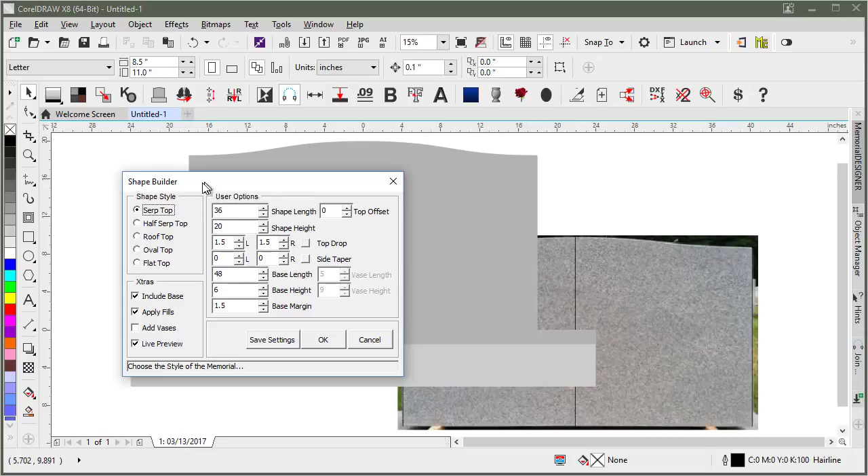So then what I would do is simply run Shape Builder here. I'll move this over to the side so we can see. With Shape Builder, I can say 36.25, because that's how big that was.

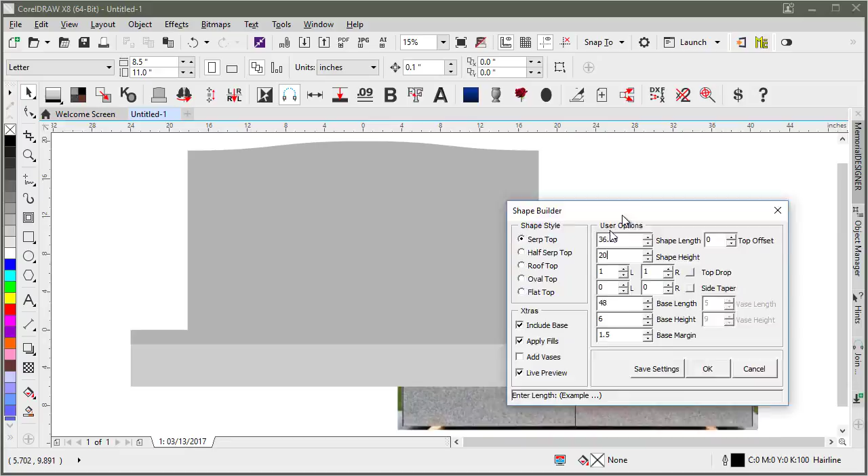The overall height was 20, and then the drop was 1 inch on either side, so I'd just do 1 inch. If it was a different size, I could adjust this either by 1/8 inch increments, or I could just type in whatever those happen to be.

And they could be different on either side. Usually you'd want them to be the same, but let's just say we kept them at 1 inch.

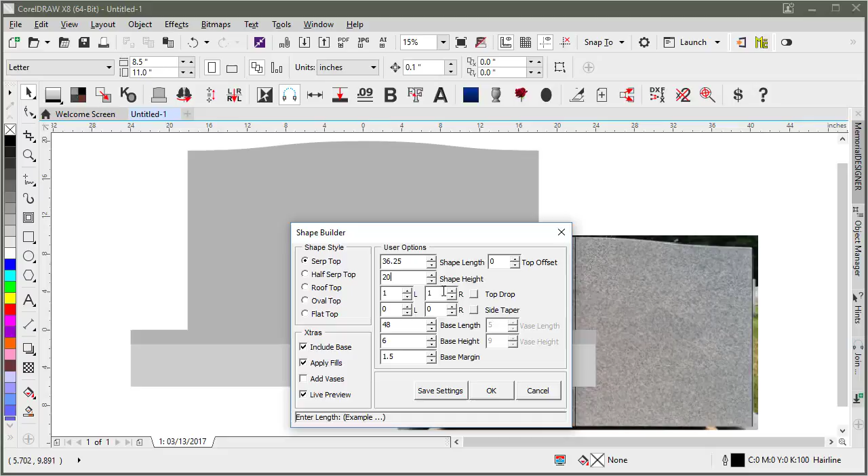So this stone should be a pretty good match for that. I'll take out the color, just give it a black outline. Maybe I'll give it a little different color outline, so I'll give it a yellow outline here, and I'll just throw it over the top of my piece here.

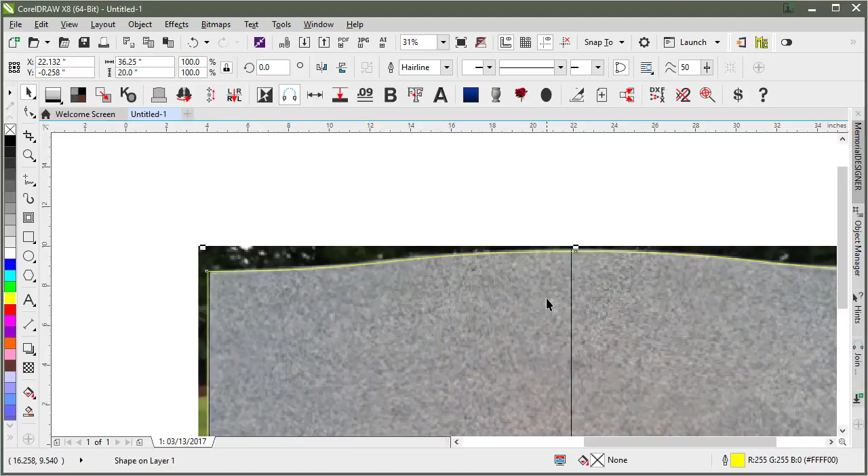And you can see that that matches there pretty darn well. So I'll just zoom into it here.

Alright, so from there, once I've got the top of the serp digitized, then I can just take my contour tool and come in as much as I want. You know, let's say I wanted it to be, I don't know, 1.5 inches, or whatever I wanted it to be.

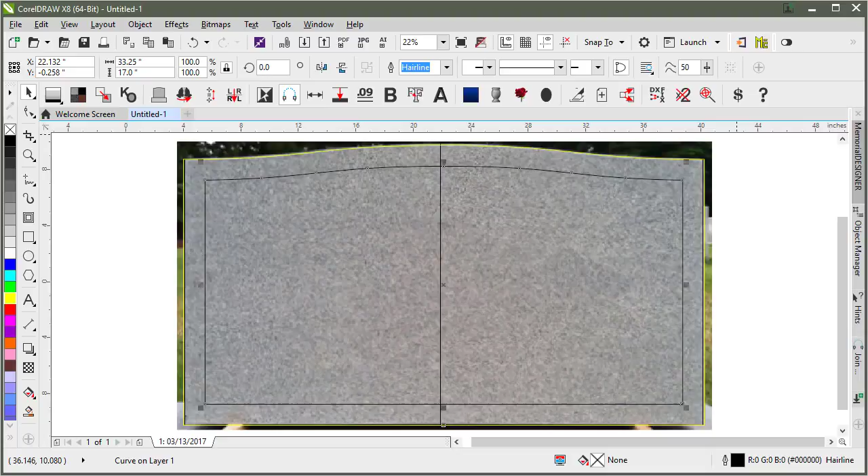I would separate those, break the contour group apart, and then I can run panels. I can choose a single line or double line, just hit apply, and it would build my panel. And now that panel is fit to the stone.

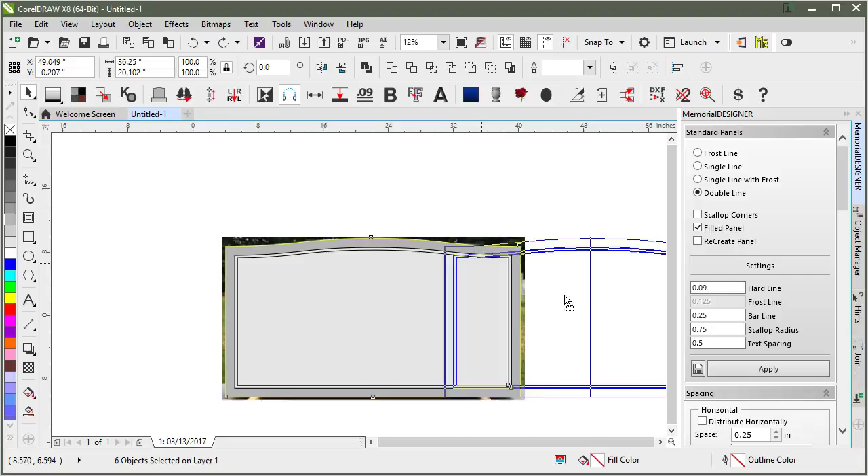So I could also fill that. Go ahead and move this over here. Get rid of those pieces I don't need.

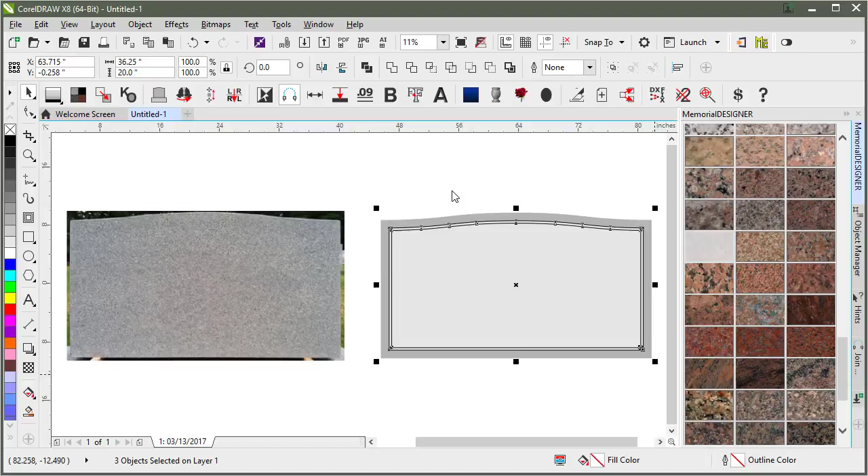And then we've got our stone, and it's also easily filled with any granite color that we want. Yeah, I guess that was gray, so I would just go back to gray.

And that's how I'd build my panel.